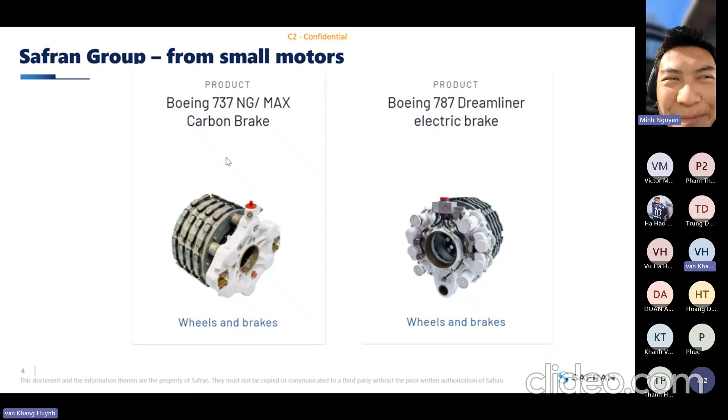So that is not impressive, I know. But the first reason is the natural convection, and the second reason is we focus more on reliability. Why we accept traditional manufacturing - traditional manufacturing, we don't have advanced manufacturing, but it should be reliable and certified in the industry. So that's the most important part.

However, my colleagues in the group can reach up to 70 Newton meters per kilogram with oil cooling. So that's much higher. In my company, we have 25, 30, and in the other company, 70. And we talk much about the torque because the speed is not that high in our applications - you will see later.

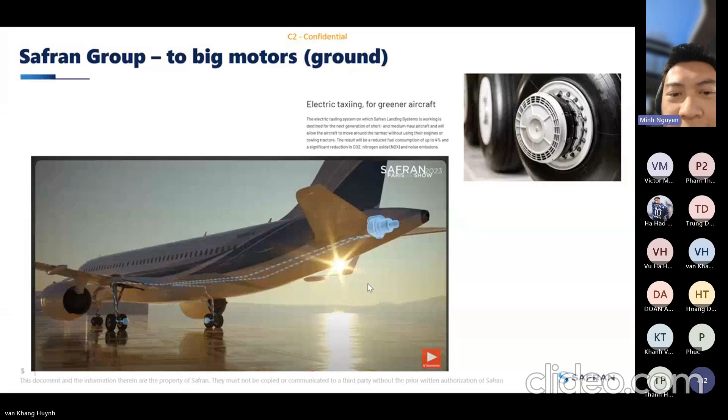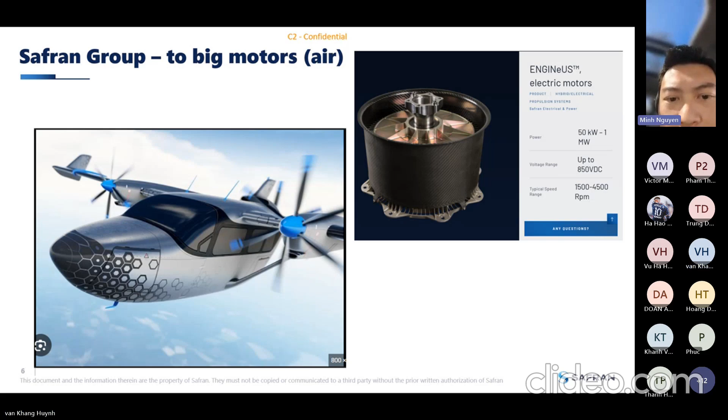But the hard part is to make it reliable. We have many solutions - in traditional motors you only have one star, here you can have many stars, many windings, for example. So those are some examples.

In the next slide, I would like to talk about how we design the motor in the group or the company. In short, firstly you have a target aircraft or a drone, for example, and the client - for example Airbus, Boeing, Hyundai, or even the Chinese Comac - they will say, okay, I would like to have an e-taxi function or a propulsion motor, and the speed and the weight of the aircraft is so and so.

And they would like to have the functions. So, okay, Safran accepts that request, and in a very short time they need to discuss together to see, okay, for this request, we can propose such a system architecture. And from the system architecture, we will define the specification for the motors - what we need to design the motors: the voltage, the maximum current, the maximum power, and the maximum torque, maximum speed, design efficiency, design power factor, etc., and the powering point, even the lowest and the highest temperature.

Our job is to propose different topologies. If cost is a criterion, we think of different topologies; if cost isn't important, we can use permanent magnet motors. So design goes from topologies to details with multi-physics.

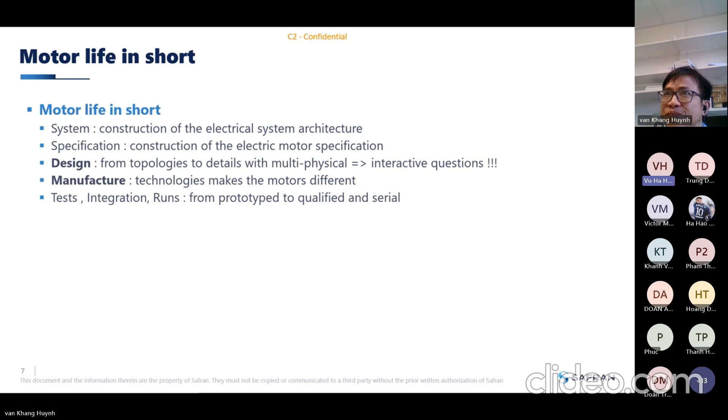I am the last one, and with the longest presentation, but I'll try my best to shorten it. Thanks so much to VPEC for giving me the chance to introduce VinFast, my team, and some of our activities.

Today's topic is an optimization strategy to balance cost, efficiency, and use of energy for the next generation of VinFast powertrain. It's a very long title, but I will take this chance to again introduce VinFast and my team. I think many people here know the name VinFast, but not in detail, so I'll give a very quick summary to the team here about VinFast and my team, then walk through this research, but very quickly.

First, I would like to introduce myself. I joined VinFast in 2018, and currently I'm in charge as Director of the Mechanical Design Center at VinFast Powertrain R&D Institute. I lead a team of about 25 members, responsible for 5 products and 7 vehicle programs, already applied on more than 1,000 cars and more than 10 markets.

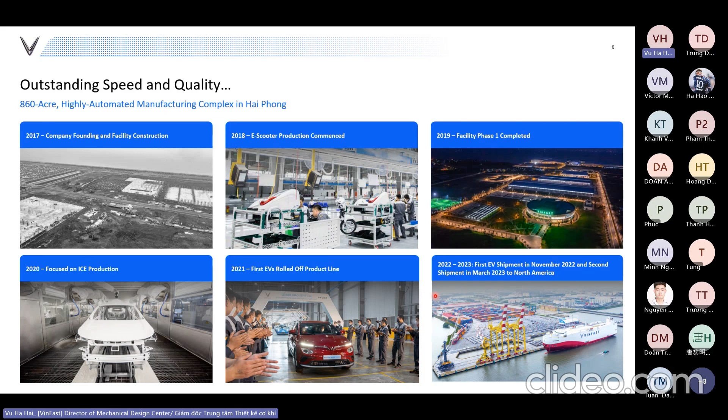Thanks to the many efforts from VinFast and Vingroup, we already became the top one in the Vietnam market and top number 8 in the global market. That is a very big motivation for a young company like VinFast, and also for our members to take part in this kind of history.

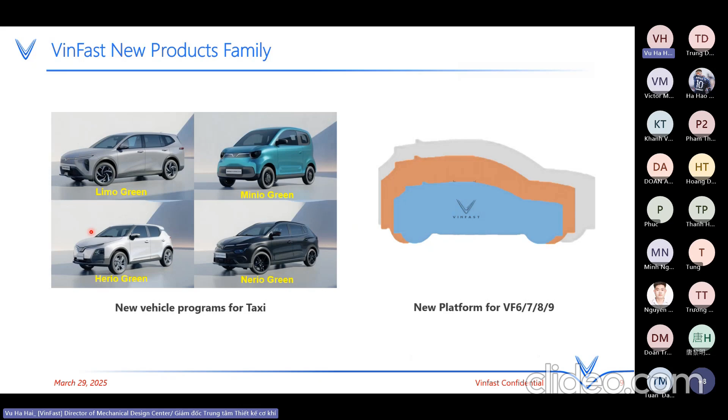And actually, we have not stopped there. We also continue to develop more models, and all of the models shown on the screen here will be launched by the end of this year and also early next year. So that is VinFast.

And how about us, VinFast E-Motor R&D Institute? Here you can see what we are responsible for. For the EV, we know the heart of the EV is the traction motor, or what we call the electric drive system, including the e-motor, transmission, and inverter. We name it the EDS. Our team works simply as the internal supplier of this product for the whole VinFast vehicle program.

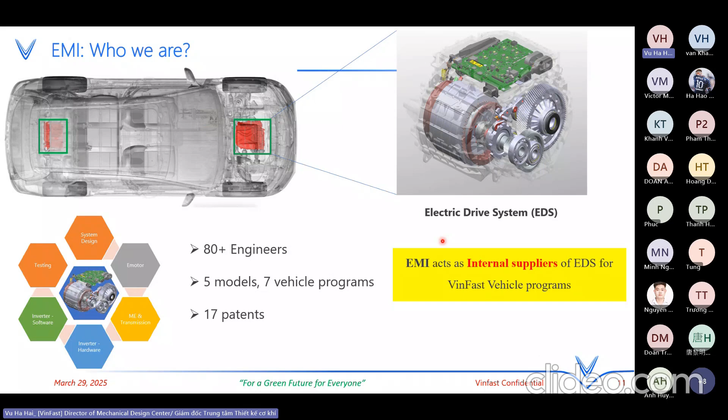It's a little bit different from other OEMs or ODMs, like ABB or Safran, or even my previous company NIDEC. Our engineers actually work in a very wide scope, from design to manufacturing, or even myself sometimes need to directly work with the customer side to explain issues that happen in the field. So we are very dynamic and need to be responsible for a very wide scope.

Just after one year, around 2023, our team developed and SOP'd the next generation. We named it EDS 2.0, and we already applied hairpin technology. So far it's applied for the VF5, 6, and 7.

We also have one advanced project before, which stopped at the sample stage. Its name is 3.0, with an 800 volt system, applying many advanced technologies in the traction motor like silicon carbide, oil cooling, and using a planetary gear system. This stopped at the sample stage, but it has a chance to be reborn in the next VinFast platform.

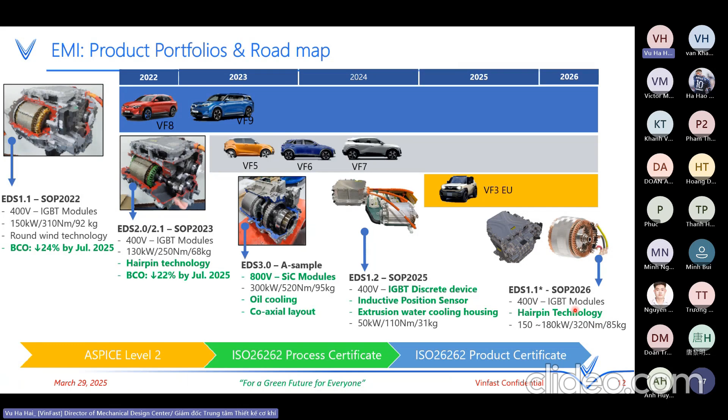During the meantime, we also had some upgrades. We developed a very small one for the VF3. This one was actually at the beginning developed for the EU market, but right now it's put on hold temporarily for VF3. We also have a plan to upgrade the EDS 1.1 from round wire technology to hairpin technology, and it will SOP by the end of this year.

To do all of this, we have a very strong approach. We try to develop our own R&D capability from the system level to the module level, and also our own testing system.

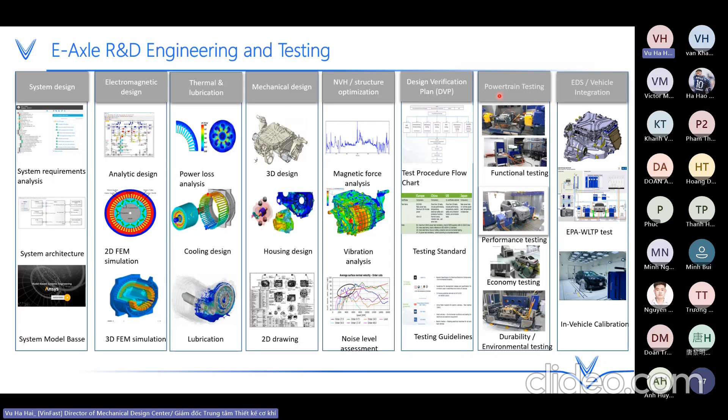I'd like to talk a bit more about the testing system, because earlier Professor Kang mentioned how ensuring reliability of the product is very important for this kind of automotive application. We have a very complete test cell system to cover more than 1,000 test cases from the vehicle level to the system level and even the component level. We need to ensure the product functions for 10 years, or equivalent to 300,000 kilometers.

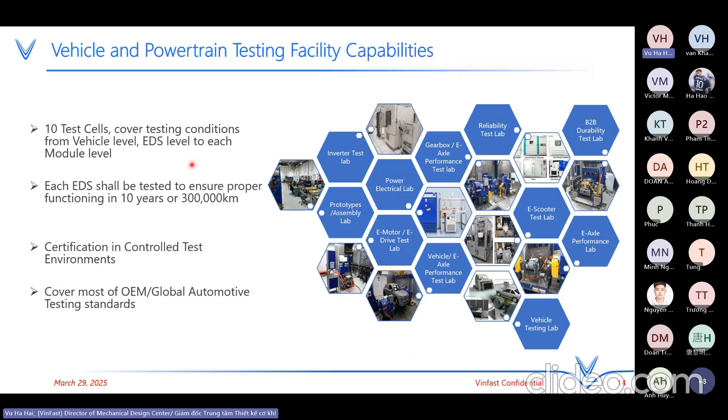Actually, this kind of standard is a little bit outdated, because I talk with OEMs in China very often, and now they have already increased the lifetime of the product to up to 350,000 or 400,000 kilometers. So the requirement from the automotive industry keeps increasing. This is our testing system, and as I mentioned, not only at the system level but also the module level, focusing on the power electronic part, or even at the vehicle level.

We also have a very complete testing system. Okay, so that is all about VinFast and the Vin Group, and also our team.

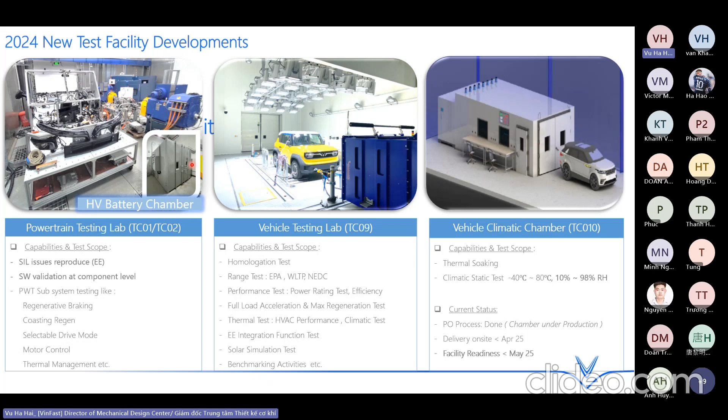Now I'll go to the background of this research optimization. This material I prepared last year, and it's not outdated yet - it's actually become more critical this year regarding cost down and new product launch speed. This is a fact happening in Asia, and VinFast, as a very young company, if we want to adapt and survive in this area, we need to find a way to catch up with this kind of requirement.

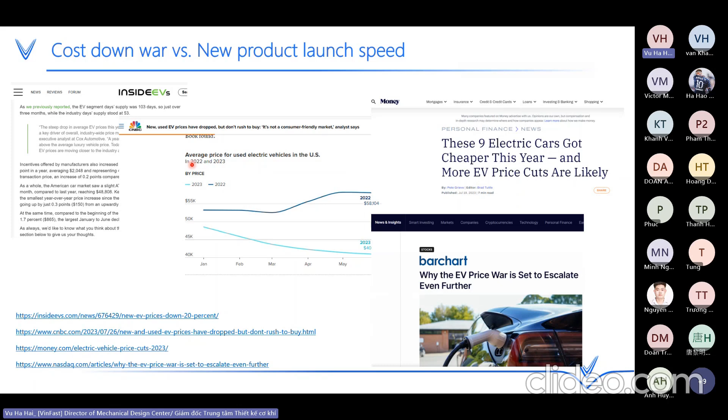So regarding the requirements of development, we always have to consider the balance between performance and cost. Everyone, all the bosses, want good performance. But good performance always comes with high BOM cost, and if we go with low cost, it's very difficult to maintain good performance. So what is the balance point? High performance and optimal cost - that is the requirement.

In development, if we want less complexity, the accuracy is also not good, but it will be calculated fast. In more detailed design, we have a medium level of complexity and calculation speed. But the most complex one, 3D or multi-physics, is always very slow. So in this research, we try to find a balance point between performance and cost, considering all these things at the feasibility phase with a certain level of accuracy, and of course we always need to calculate it as fast as possible.

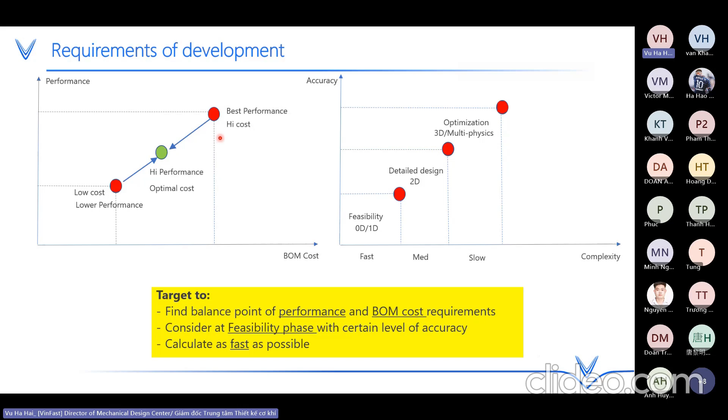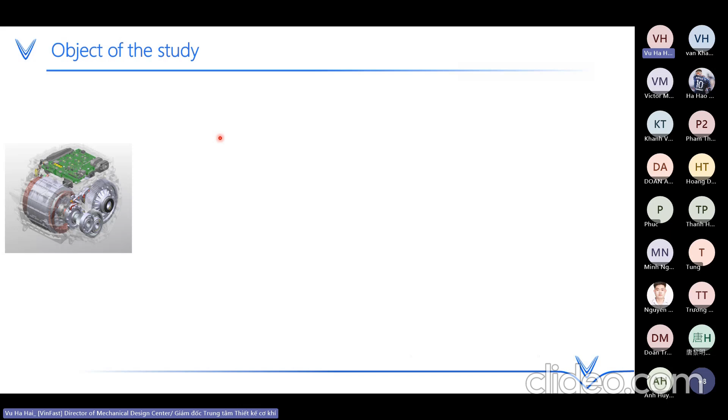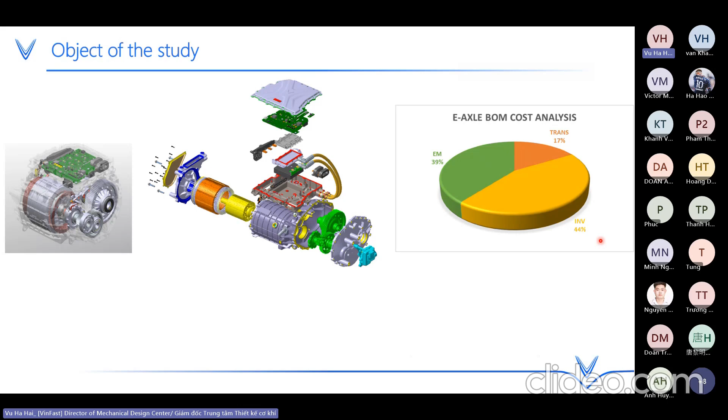So many points need to be considered, but what is the specific objective of this study? Let's talk about our EDS - it includes many parts like this. We look at the BOM cost ratio between parts like the motor side, transmission side, and inverter side. In this study, we focus more on the e-motor side, and we try to optimize the performance and the BOM cost of the e-motor.

So what methodology have we done? Firstly, we try to develop a platform for the study. I think all the researchers here familiar with electric machine design know about analytical calculation - we can use theoretical formulas and equations, or some commercial or even open source calculation tools. It's quick, very quick, simple, low investment, but of course the accuracy is a question.

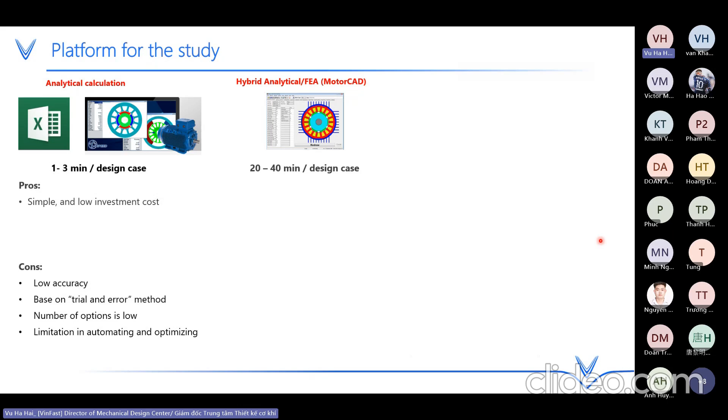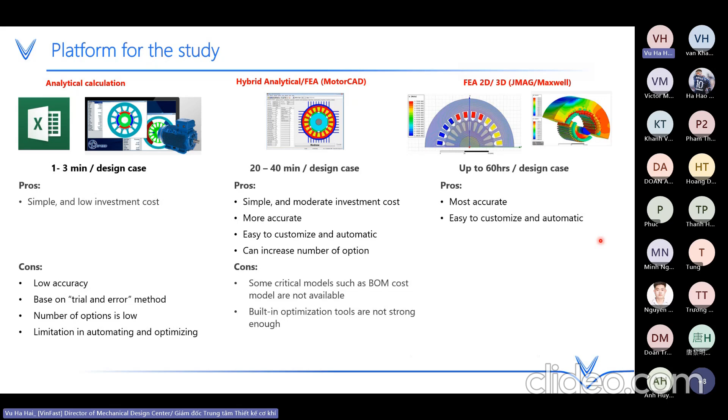We also tried, if we want something more accurate, a hybrid approach like analytical and FEA, such as MotorCAD, which takes a bit longer. It seems simple, moderate investment cost, more accuracy, easy customization, increased number of options, but it still has some drawbacks. And of course the last option, using directly 2D or 3D, will take a longer time, but it will help us get a more accurate result.

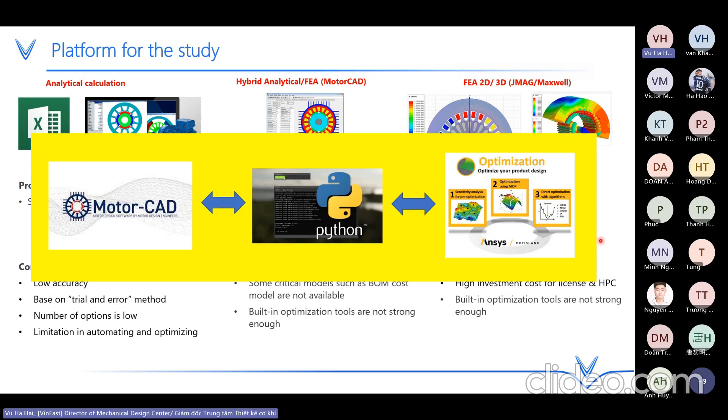So we were thinking how to utilize the pros of each method, and we selected MotorCAD for the solver, and we use optimization based on ANSYS for that. What is the main contribution here? We tried to create a Python script with many kinds of user-defined functions to connect these two tools, to optimize our product according to our requirements. So that is the platform for this study.

For the development flow, I'll go very quickly. We have about 4 steps: the first is sizing, then sensitivity analysis, optimization, and validation. Each of these steps has a different implementation time.

We already ran one study, and it takes about 48 hours to get up to 100,000 designs, and it gives us some options, and we select the best one to validate the design. Okay, so that is the development flow.

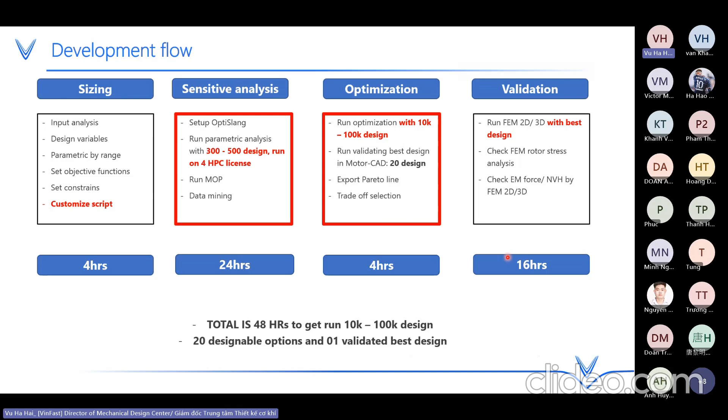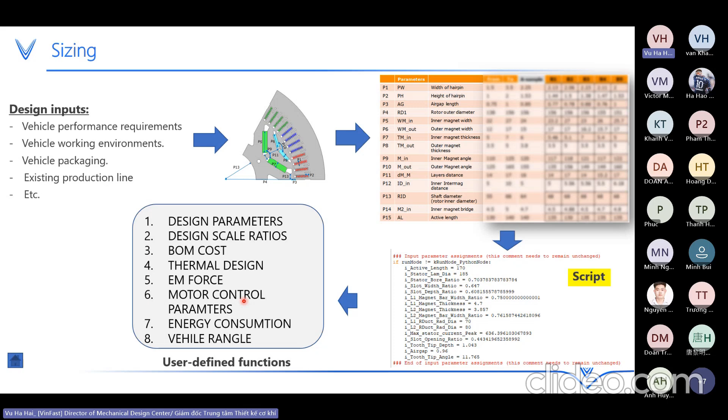One of the more important things in this script I want to focus on is two things: one is cost. This is very critical for the industry or the OEM, like us, because we need to know about the BOM cost right at the beginning. So we consider all the factors that impact BOM cost and put it in our script.

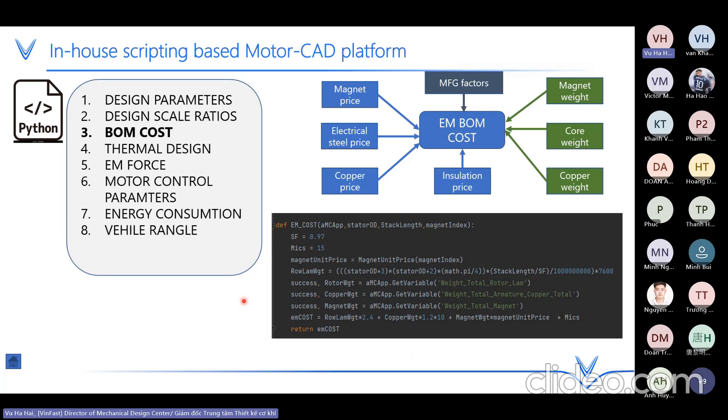The second one is about the NVH. MotorCAD actually has one tool to support doing it, but we want to make it part of the optimization process. So we create a script to collect all the EM force, extract it, and put it into the optimization process to optimize the NVH of the machine.

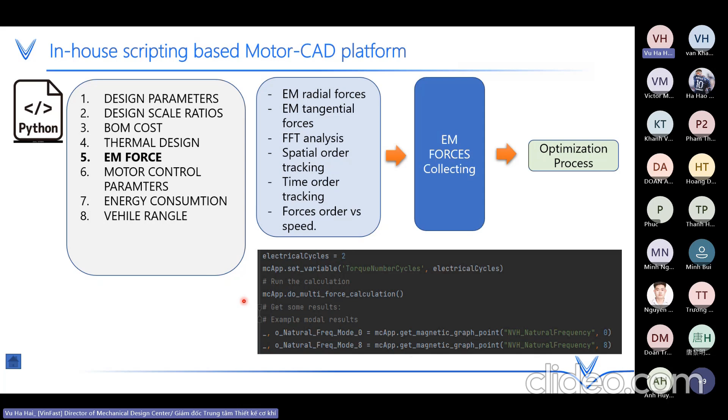After that, we run the first sensitivity analysis with 300 designs to see if it's feasible with all the constraints, all the ranges. If we get a result, it means it's feasible with all the constraints we set at the beginning.

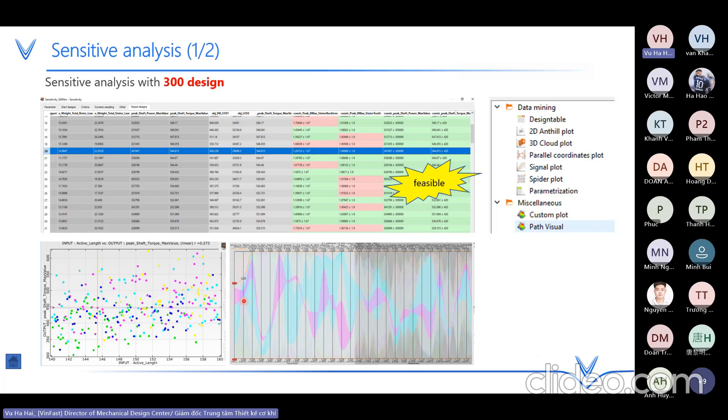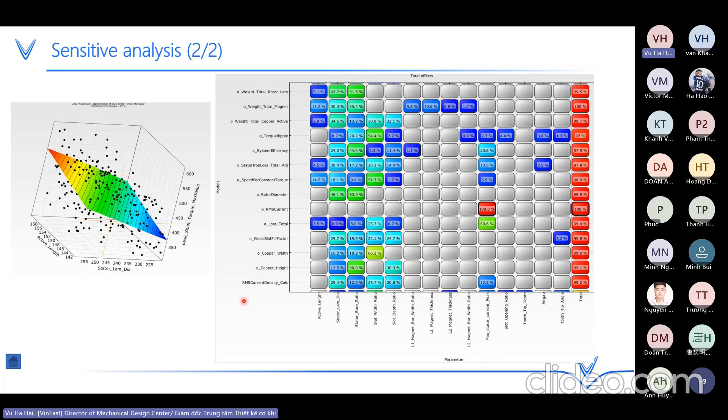Next, we can define deeper analysis to see which is the critical parameter impacting the performance of the e-motor. And the last one, we run the optimization process to get some options, considering both the performance and the BOM cost.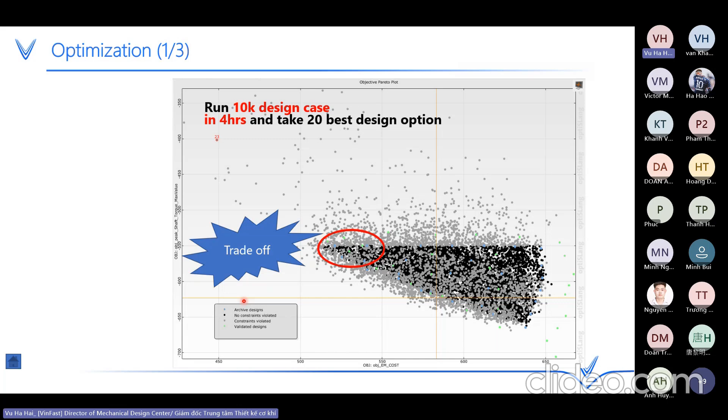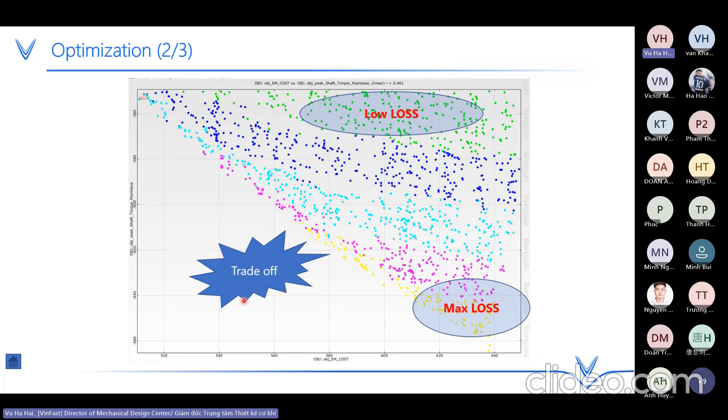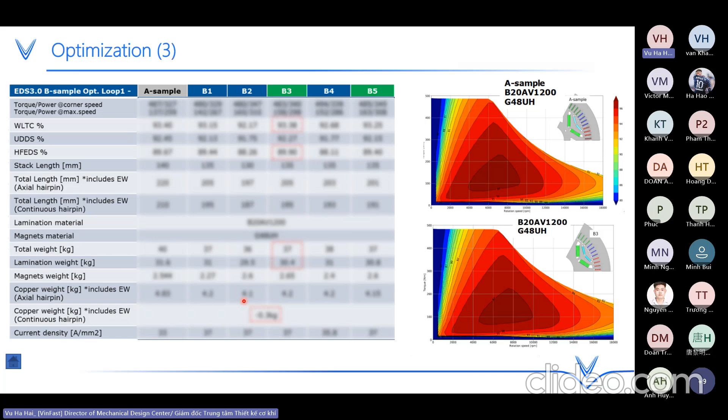We also consider the trade-off between efficiency or performance and the BOM cost, and we have selected some of the most potential candidates to do further validation. For validation, we can go directly with 2D and 3D to do the design validation.

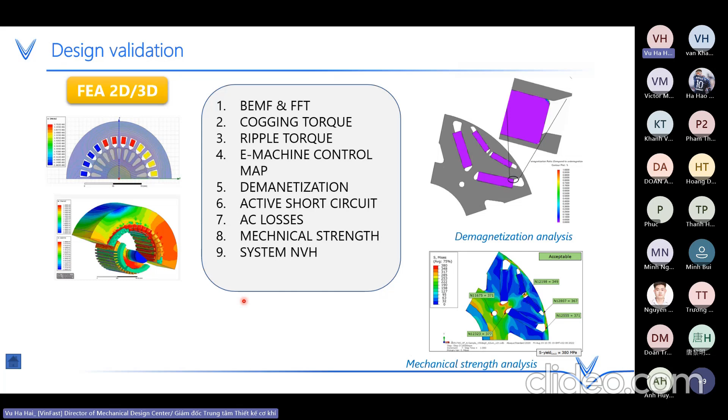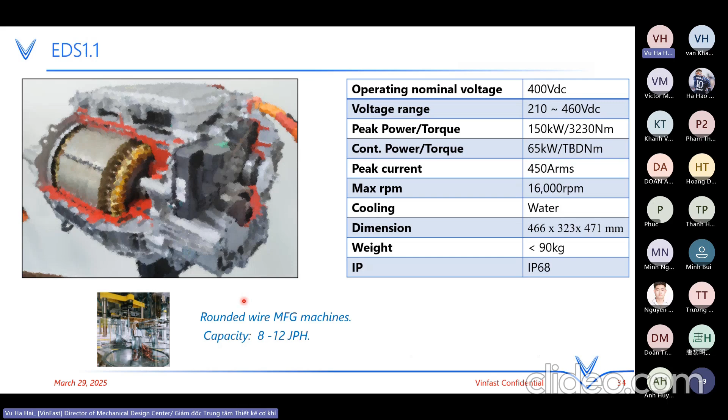So this is the whole process. For this method, we focus on the EDS 1.1. This is the spec, and as I mentioned at the beginning, this one is still using the very conventional round wire technology. So it has some disadvantages, like still using conventional wiring technology and having lower capacity, and it needs to improve by applying exactly the methods I introduced.

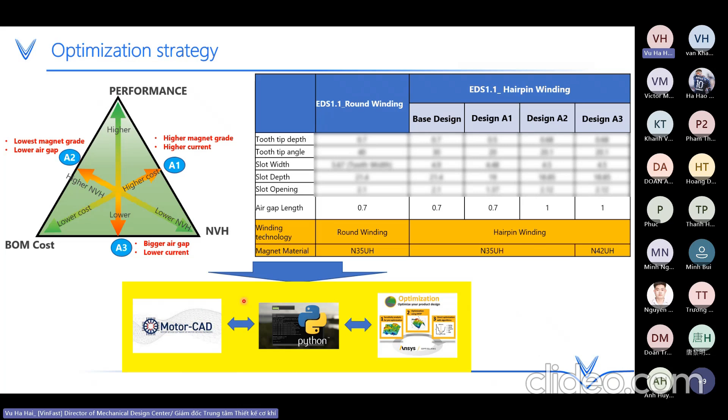We consider performance, NVH, and BOM cost, and run using our study platform to do the optimization. After running through all the analysis, we have many options between the selection of the magnet, the air gap, the copper loss, or the EM force, and it reflects into the efficiency, ripple, and EM force.

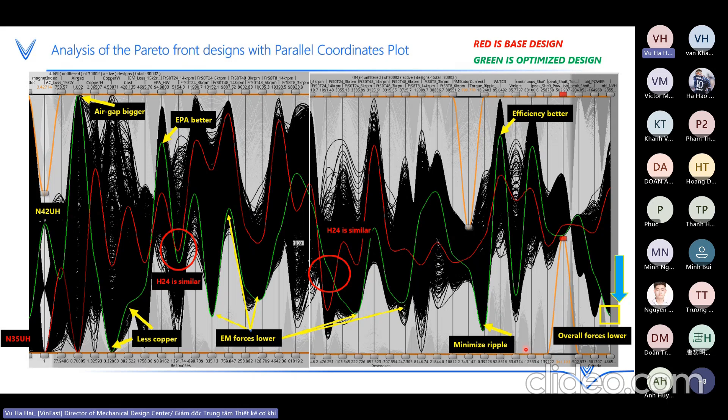In this study, we use the current round wire as a base, and we compare with three candidates using the hairpin, comparing the pros and cons about what performance we can reach, and the cost we can save, or efficiency we can increase.

In this study, we selected the first one and the second one, where we get the most balance: we still have better efficiency, overall better cost, and also better NVH performance. So that is the result of this study.

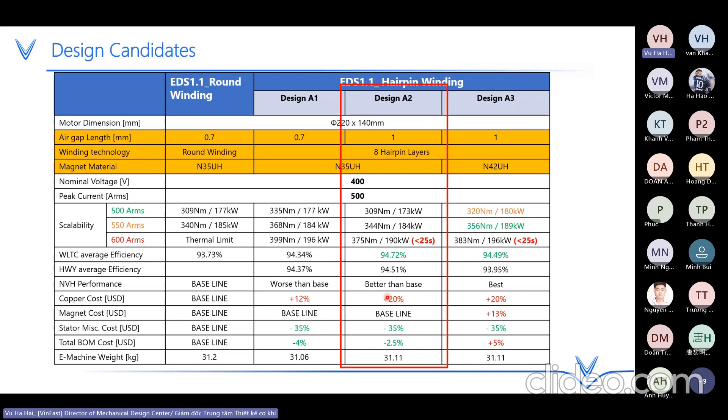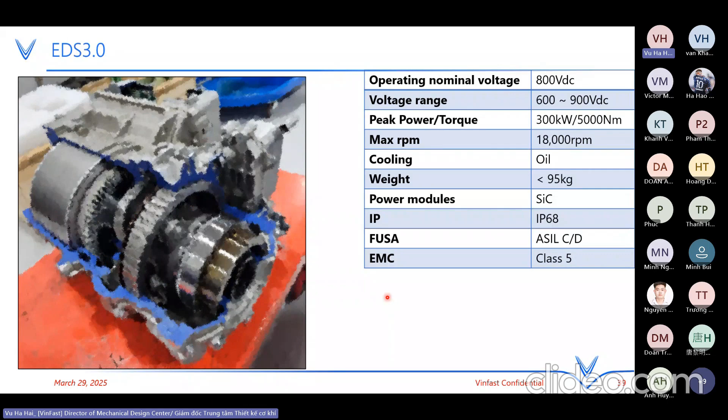We also applied the same methods for our second generation 2.0, and also for 3.0. The last one, we're talking about the round wire and the hairpin. Actually it's not new, but for VinFast, as you can see, it's only around 3 years, and we already changed from the very conventional technology to the more advanced one, which is also our direction.

We can continue to apply the hairpin technology, and there is some new technology coming, like the wave hairpin, now dominated by Schaeffler, or some X-pin or W-pin developed by China ODMs, and VinFast will apply all of this new technology for our next generation of products.

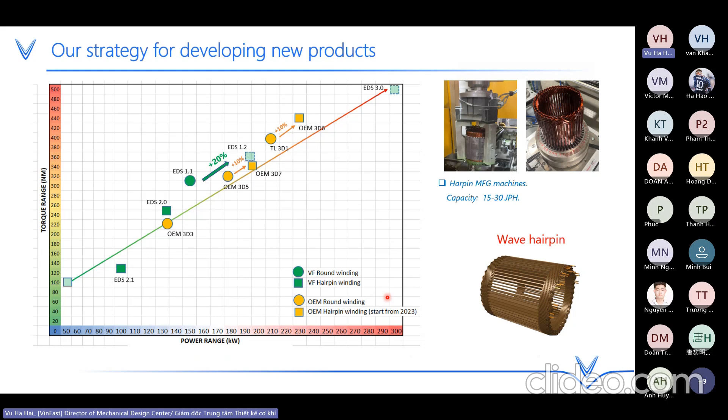So for the last one, just a very brief summary: in fact we're very young, but we're dynamic, and we try to find different ways to catch up with the technology in this area. As part of this, our team also tries to do our own R&D to have sufficient process or tools to make motor design very quick, but reliable and efficient.

In terms of development, okay, so that is all my presentation. Thank you for your patience in hearing this. Yeah, thank you.

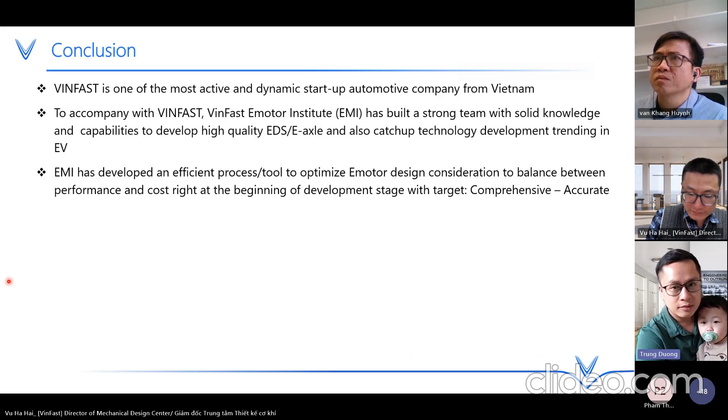Okay, firstly, related to the confidential part, let me try to review the material again. But I think 99% is publishable. It can be published, so it's fine. But I will review it again before confirming to you.

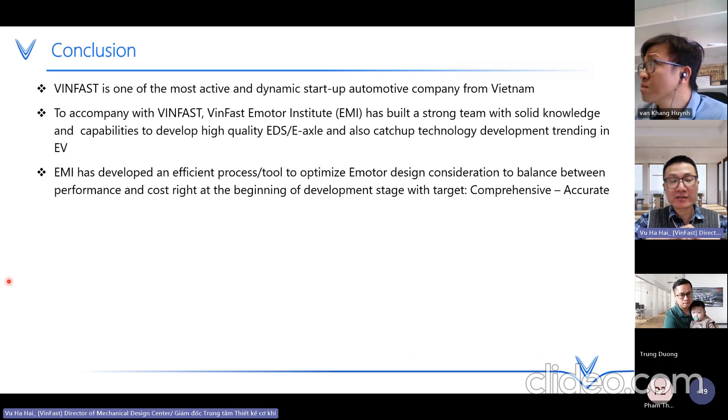And about the BOM calculation, you are right. But we separate the manufacturing and labor cost, and we leave it to the factory side, because when we put it into that calculation, it may be more complex. So we just focus on the material cost here. And in fact, the material cost also needs to be updated with the variation in the market. So even as engineers, we need to have very close communication with the purchasing team or even talk directly with the supplier, so we try to get the latest material cost.

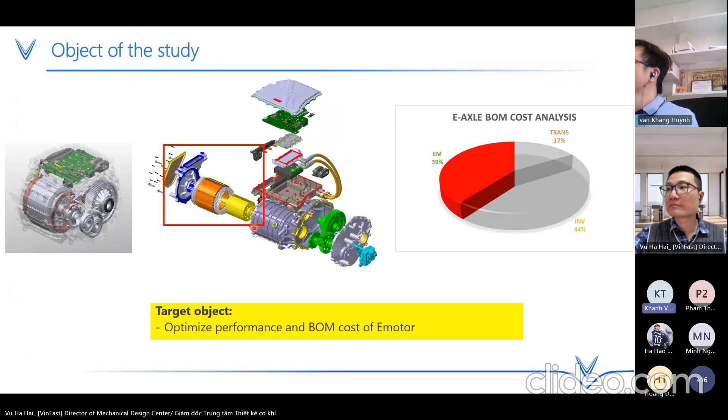When I saw the documentation on page 12, I noticed that the VF7 has a bigger size than the VF3, but you use a smaller power rating. So can you explain why? And I see you mentioned using the oil cooling technique, so can I ask which oil spray cooling technique you are using and which part of the motor you are focusing oil spray cooling on? And my final question is about the EDS 3.0 version. Did you try to do it at 800 volts, but the motor is 400 volts? So can you just tell me the reason why?

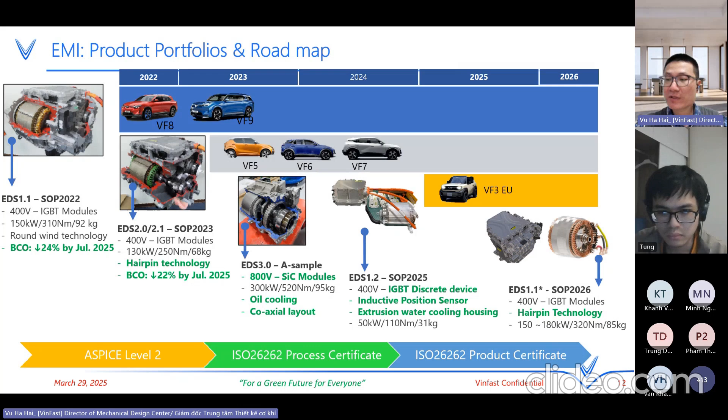The second thing is a very smart strategy from VinFast's side. For example, we use a leasing strategy for the battery, so we can give customers the chance to own a car at a lower price. The battery costs about 50% of the BOM cost for the whole car, so VinFast now takes that risk, which is also about the investment and about how to recycle this kind of battery.

But to win the customer, we're willing to take that risk. This is what we're trying to do now, and we can also continue improving it. As I showed in the presentation, we also have a new platform coming, and on that platform we try to adapt new technology in this area, so we can gradually improve our competitiveness in core technology.